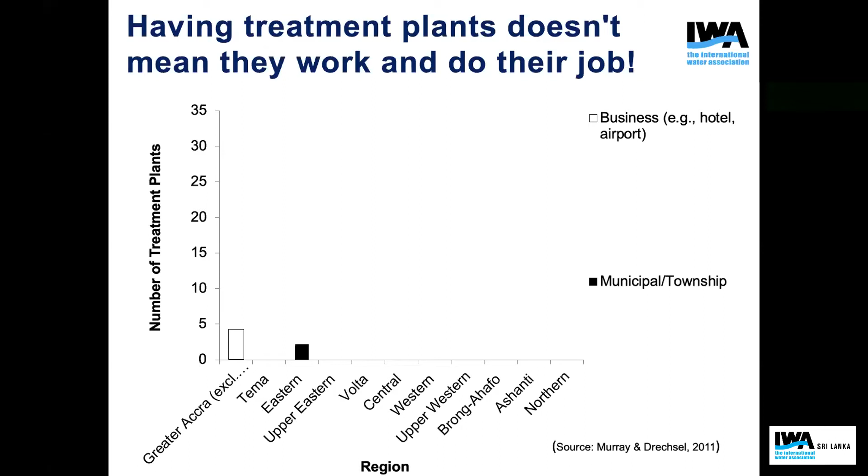When we look at moving forward, I think most people understand that sanitation really needs some sort of disruption. We have to design systems that are simpler and much more sustainable. They have to have small footprints, and much lower CapEx and OpEx costs so that they can be financially sustainable moving forward.

I think there's also a recognition that sewers and wastewater treatment might not always be the best option, particularly in developing countries. These systems tend to be much higher in terms of running costs, with much higher energy and water inputs. When you're in an environment where water and energy may be unreliable, and you have very poor operation and maintenance paradigms, these systems become dysfunctional.

The other problem is that while sewers and wastewater treatment works have been built but not functioned particularly well, the systems we've put in place for on-site sanitation have also not performed particularly well. From a user's perspective, they're very often not preferred solutions because they're smelly, they're not desludged regularly, and so they're not a very attractive option. Now, they may be attractive from a cost and maintenance perspective, but the way we're implementing them now is probably not appropriate. So we have a situation where both the sewers and wastewater treatment solutions aren't particularly great, but also the on-site solutions are also not particularly great.

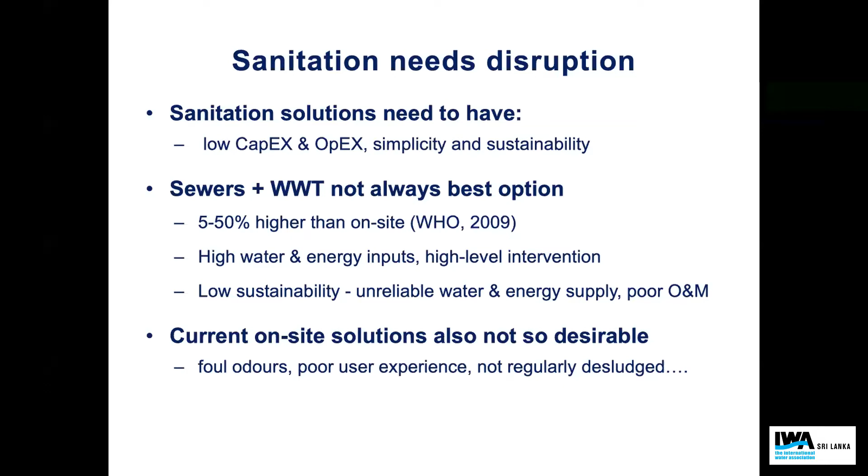So we do need some innovative thinking in this space to come up with solutions that are going to work. One of the interesting opportunities we have is that we can learn quite a lot from the mistakes that the West has made. When I look at wastewater technology development in the West, it's been a very hit and miss type approach.

They started 50 years ago with very clunky systems, very large concrete infrastructure, based primarily on a lot of rules of thumb. You can almost imagine the last 30 to 40 years was like one big pilot study in the West, where they were really trying to understand how wastewater treatment processes work, and trying to optimize them. They've started to develop some innovations, and you can see some of them there at the bottom, things like granular sludge, things like Anammox processes.

These processes have all brought down the size of these systems, and improved the energy efficiency of these systems. Now these innovations have also enabled very good cost recovery, resource recovery and reuse, where you can extract things like nutrients and energy from your waste streams and utilize them effectively. So in the developing world, I think we have this opportunity to learn from that process the West went through, where they had very clunky, quite cumbersome infrastructure, moving to systems now which have much smaller footprints and are much more efficient.

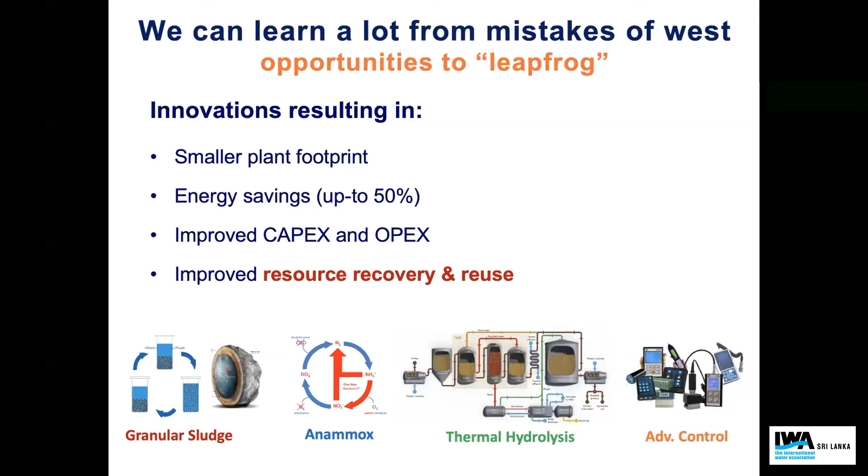When I look at the sort of things that are driving the water sector, I see two things. The first is around the productive use of water. This is where the water sector is moving away from the idea that they want to use drinking water for everything, and are now asking themselves, what is it that I want the water to do for me, and how can I match the quantity and quality of water for that intended use? So they're moving away from one quality for everything, towards mixed quality uses.

This idea of creating different qualities for different intended uses, you see in many places. On your left-hand side, this is the West Basin Initiative in California, in Los Angeles, where they actually produce designer waters, using different plug-and-play technologies to create different grades of water for different uses.

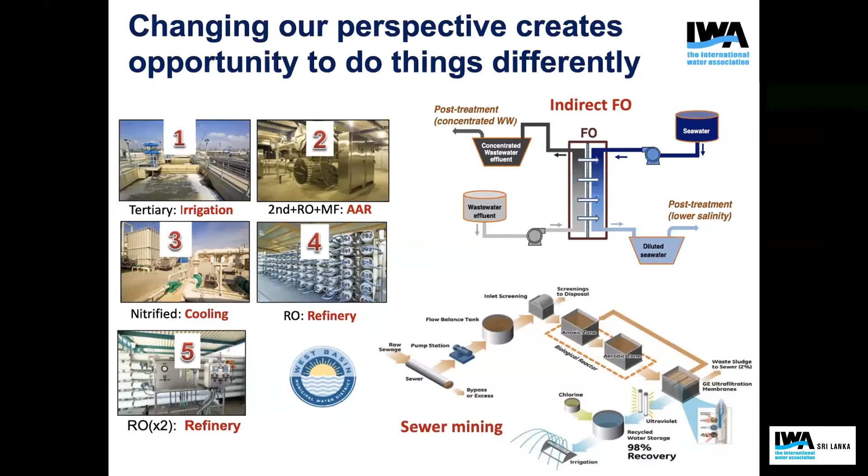In the bottom right-hand corner, you have an example from Australia, where they are viewing the sewer as a water source. They extract the sewage and treat it to supply things like irrigation water. The perspective is that sewerage is a constant supply of water—it's always there because people have to flush their toilets, so there's a fairly constant baseline flow of water.

This is an example from Chennai, where recently we've been doing... someone has their microphone on, so I can hear some background noise. Sorry, can you please mute yourself, because we get some interruptions. Dear ladies and gentlemen, please.

So this is from Chennai. They recently had a very extreme drought and have really started to diversify their water sources, not relying on one source but looking at options. Surface water and groundwater is the usual option, but they've invested a fair amount in desal, large amounts of wastewater reuse particularly for industrial estates, and rainwater harvesting and demand management. Very interestingly, they have quite a lot of mines and quarries on the outskirts of the city that were acting as reservoirs. During the recent drought, they started to extract that water, treat it, and use it for purposes within the city.

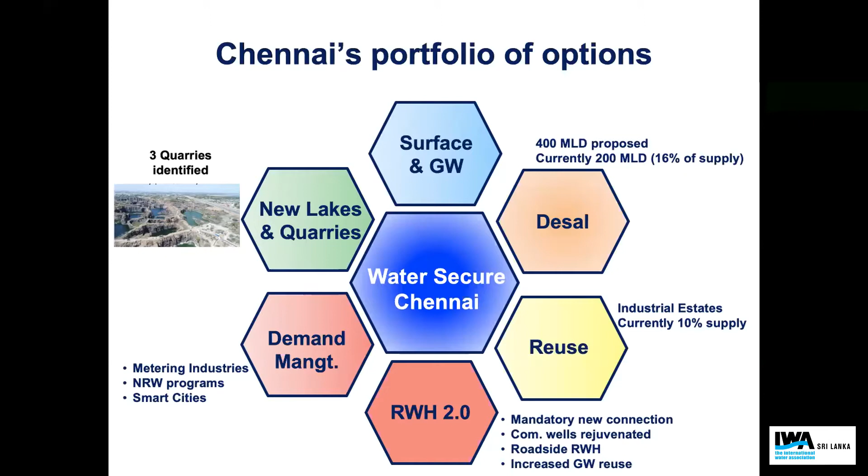This idea of creating a portfolio of solutions to meet growing demand is consistent with the productive use of water. When we think about different grades of water for different uses, we have to view the water cycle as one, and view all water within it as good water, just of different grades. You have traditional sources—surface water, groundwater—treated and fairly high quality. Your leakage and demand management water is also high quality drinking water that can free up a lot of resources. And your gray and black water can be used, with or without treatment, for purposes like irrigation.

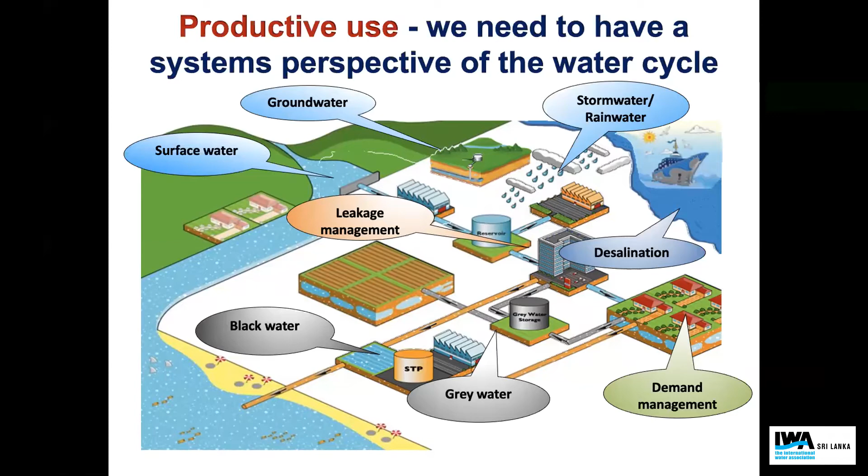For example, if I needed more drinking water for a community, the question would be: do I invest in extracting more surface water and groundwater to meet that growing demand, or do I invest in leakage and demand management, which could free up high quality water for that use? If I needed water for gardening purposes, would I automatically extract more surface water and groundwater, or could I treat my gray or black water and use it for that purpose? By viewing the entire water cycle as one, you can match different needs to the different flows that exist, and minimize your overall water footprint.

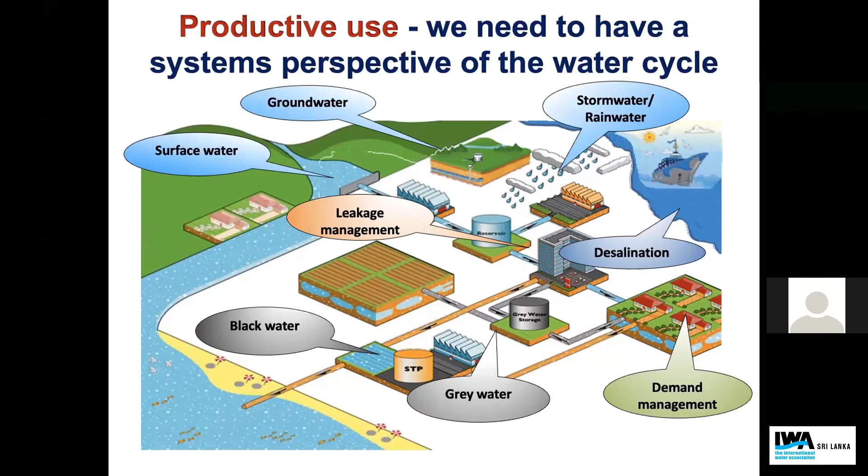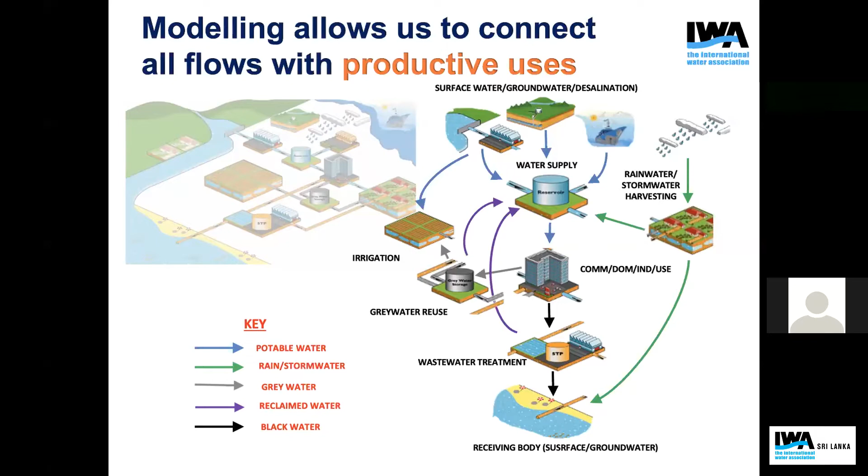Critical to this is really having a systems perspective—this idea of connecting different flows to different types of users and matching different grades to different users. By doing this, you can do water balancing, both in terms of quantity and contaminant fluxes, which allows you to minimize your water footprint. We've done a lot of work in this respect, applied both in India and in many countries in Africa.

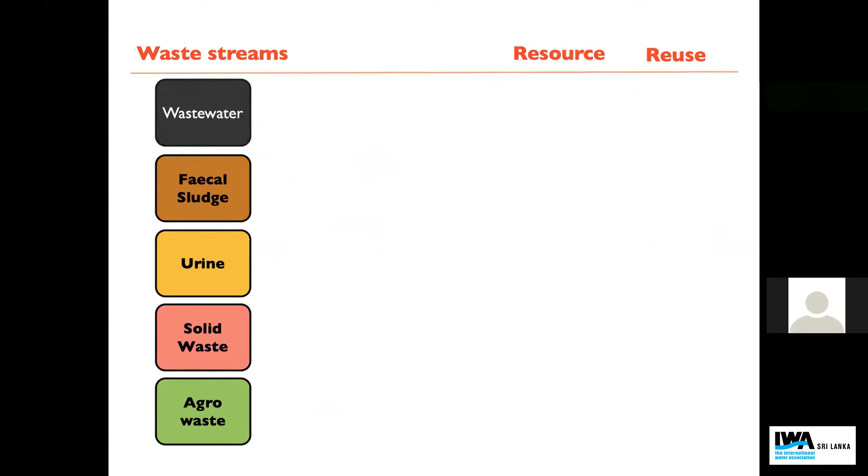The other big change in paradigm is this idea of waste as a resource. There are many waste streams that exist within an urban context, but also within the rural-urban interface, and those waste streams can be used very productively for different uses. It's this combination of different waste streams that is very interesting.

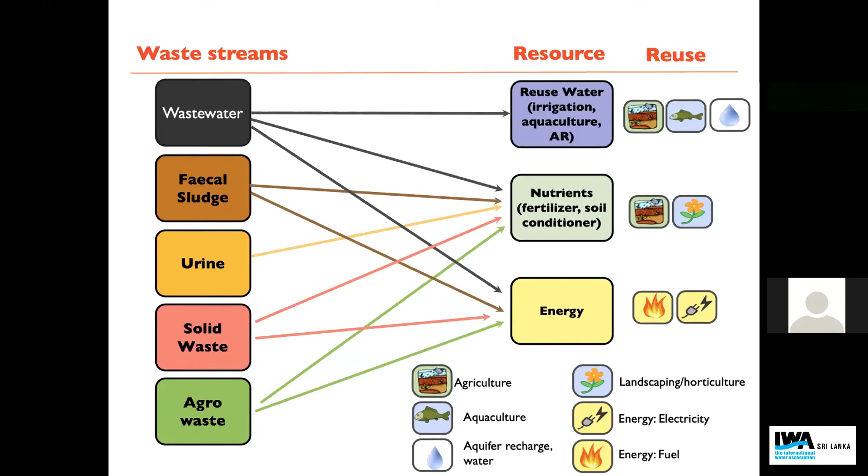For example, if you wanted to produce substantial amounts of energy, it would be worthwhile considering the combination of wastewater combined with agro-industrial waste, which would maximize your energy production potential. Where you locate your energy-producing machine would be very much based on where these different resource streams could be harvested. So it's the combination of these different waste streams that really gives you value.

Not just that, but it's also where within the water cycle that you decide to capture some of this value. If you're looking at energy, there's been a lot of research where people have tried to look at how they might capture energy through microturbines, both in drinking water networks, but also in the sewer networks.

Heat recovery is very common in sewer networks. People are able to use heat capturing devices. And then, of course, at the centralized treatment works where you can get biogas production through anaerobic digestion, or now innovations in things like microbial fuel cells.

In terms of nutrient recovery, again, you can capture that in different places. You can do it on site. Fecal sludge management allows you to generate nutrients, sort of with on-site sanitation systems, but you can also do it in a centralized sort of treatment works as well. So where you place your recovery options is also very, very important.

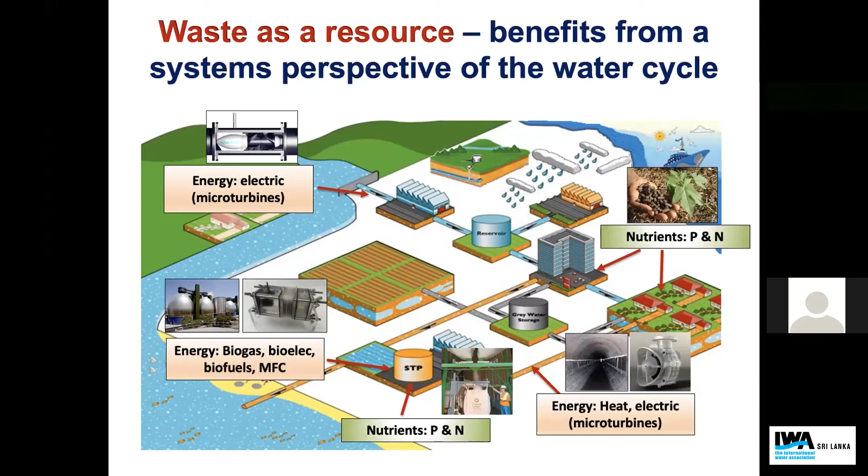But there are challenges, right, when you start to do things like resource recovery and reuse. And it's really the context in which you're working your systems.

If you take energy, for example, there are many barriers. There are market risks associated, for example, with competition from other fuel providers. If you are competing with other fuel providers who are being subsidized, then it's very difficult for you to make a business case. If you do decide to co-digest with, say, municipal solid waste, then you have challenges with the non-segregation of waste, the low tipping fees for waste collection, and then things like non-compliance with regulations.

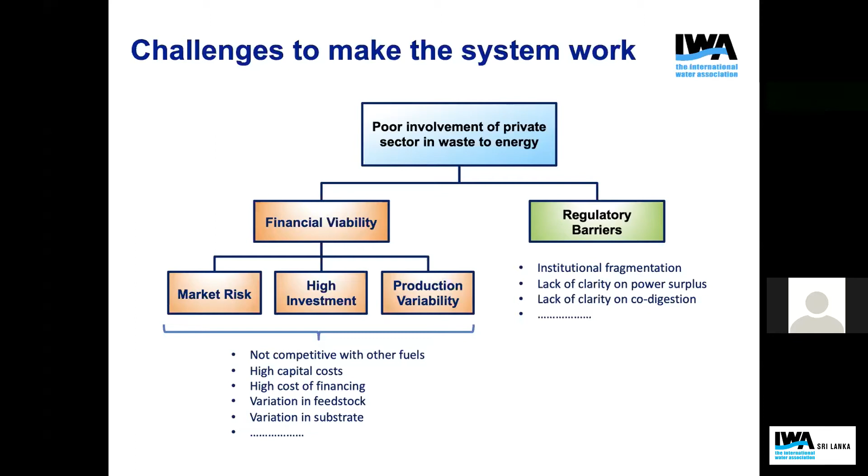Now, all of these issues might result in inferior quality substrates that affect the productivity of your plant and ultimately affect the amount of energy that you can generate. And so you have to understand the context in which you're operating and the landscape so that you can see if actually there is a business to be done here. Is it really worth your while to try and capture and generate value from your waste streams?

And for this, understanding of the business models is key. And again, when I was at IWMI, we did a lot of work around these business models. And what we found was that many of these resource recovery reuse systems didn't work because people didn't really understand who the customers were for the products that they were generating. They didn't understand what their value proposition was. They didn't understand why a customer would choose to buy fertilizers from them rather than buying it from somebody else.

Was it because their fertilizer was cheaper? Was it because their fertilizer was more effective? Was it because their fertilizer was green? And they didn't really understand the effort it required for them to take that value proposition to the customer. So how much infrastructure would have to be created, and what would be the cost of that infrastructure for them to actually take their product to the customer and sell it effectively?

And so many of these resource recovery systems work initially because someone is funding it. So there is risk capital. But when these systems are left to their own devices and they have to make money by themselves, they become very problematic. So I think it's very important to recognize some of these issues.

Particularly as we move forward in WASH, where we're trying to use resource recovery and reuse as a way to finance the operating maintenance cost of our infrastructure. So in the next 20 years, I do think that it's going to be a golden age for WASH. I think a lot is happening, huge amounts of investment, both in wastewater and in non-sewered sanitation. But I think we need to think about how we do things better.

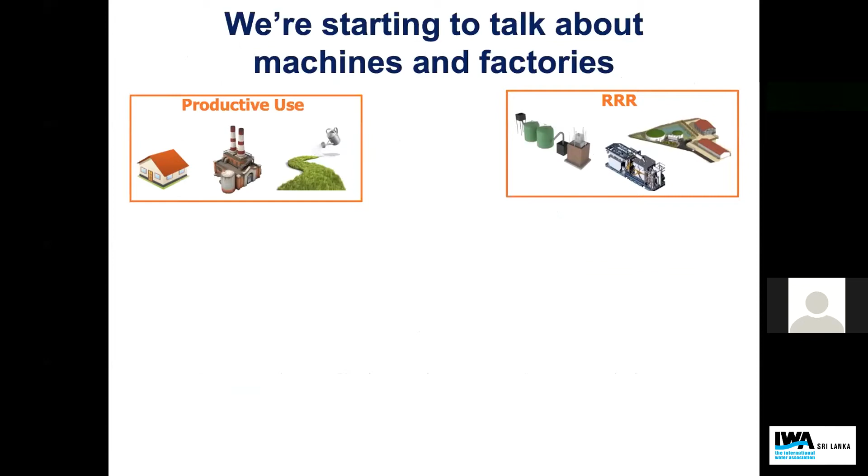Finally, these two concepts of productive use and resource recovery and reuse are shifting thinking within the water sector away from the idea of water treatment systems and wastewater treatment systems, toward this idea of a water machine or water factory, where the machine can take waters of different grades and you turn the handle, and it produces waters of different grades for different users—a bit like the designer waters I was talking about.

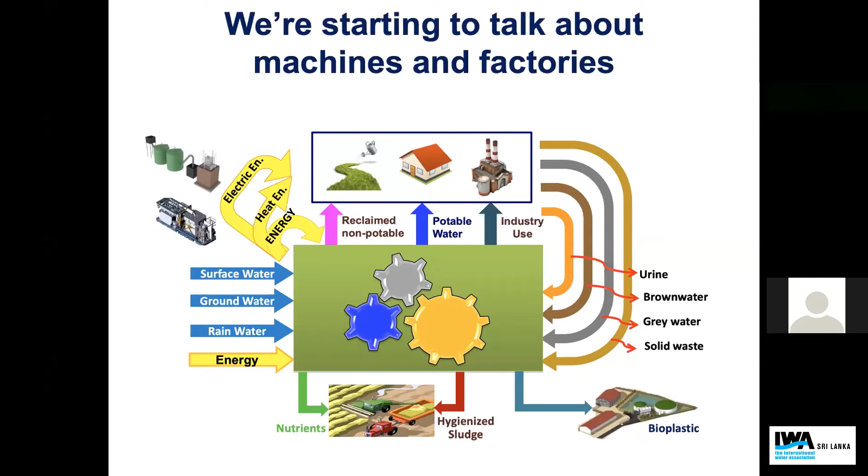You can turn this handle and the machine can produce energy in the form of heat or electricity, and you can turn the handle and it can produce other byproducts like nutrients and bioplastics, etc. So people from outside the water sector are starting to develop these types of systems. Where they locate them and how they design them may not be primarily driven by thinking around water—they might actually want an energy machine, and see water and its products as feedstock. So the whole system is designed around another objective, and water is seen as a byproduct.

As I said, scale starts to become very important, and as you start doing these clever things, you want to maintain a relatively small scale. The work we've done has shown that populations of around 30 to 50,000 inhabitants is a good scale to do some of these clever resource recovery and reuse type options.

The other benefit of these decentralized or distributed systems is that in growing urban areas, as they grow over time, you can incrementally add modules. You're not building centralized infrastructure—a backbone that serves a large city from the outset—but instead adding these decentralized units. Your system grows with the city, allowing you to follow that growth trajectory accurately, instead of anticipating growth and ending up with unused capacity. And even in areas where you already have centralized infrastructure—

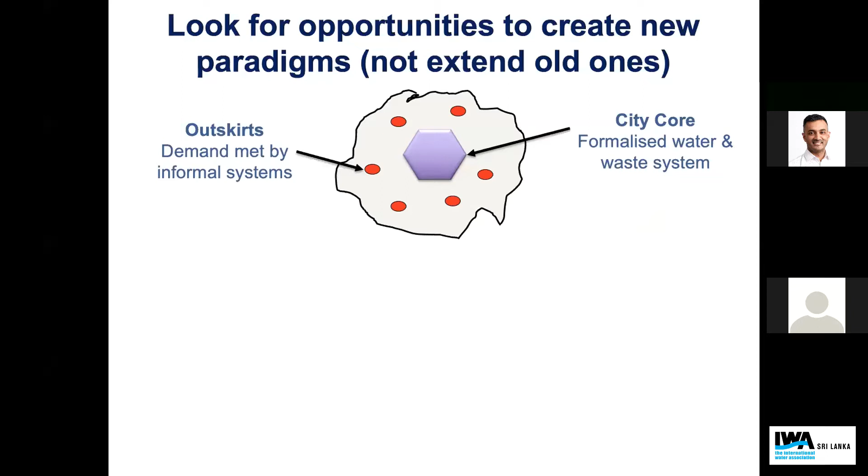if you look at this pinkish-purplish hexagon in the middle as your centralized sewer network, and on the outskirts people have been using on-site sanitation, shown as red dots—the traditional model, particularly in colonial countries where the central infrastructure might have been built by the colonialists, is that as we've grown, we've just extended that centralized infrastructure outward from the center. So we end up with very large spaghetti-type systems.

That's certainly the case for our water networks. With sewer networks we find large areas not covered, but we keep trying to extend that centralized core. The new paradigm is to say: forget the centralized core, ring-fence it, and treat it as one unit of operation. Then on the outskirts, try to create decentralized units—so you end up with a hybrid model.

You can have a part of the city that has centralized systems, but another part of the city where you have decentralized units, which give you a lot more flexibility to do some of these clever things.

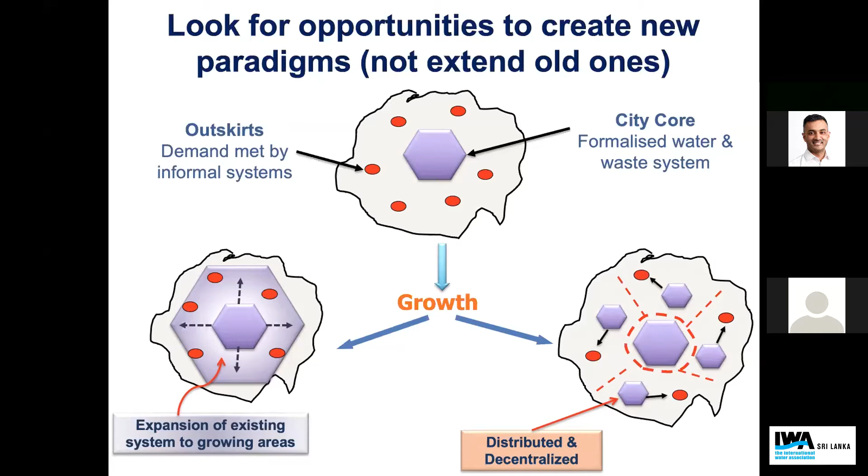I always finish with this slide. As a sector, and I think this is also true for Sri Lanka, we have various options available to us. We can stay in the business-as-usual lane, but that's not really an option because with global change pressures taking place, particularly climate change, but also urbanization and population growth, there is going to be a supply-demand deficit in terms of water. So we can't keep building the same systems we've been building, which are really based around 19th century ideas.

What we are currently doing is we're in the middle lane. We're trying to optimize these bad systems that we've built. We're trying to get as much as we can out of them, trying to improve them. But the scope they have is very limited, and the margins are not very large.

I think for developing countries, there is an opportunity, particularly in wastewater and sanitation, where there isn't much infrastructure currently in place, for us to do something very different. We can start from the outset looking at what we want the water to do for us. Can we have different grades of water for different uses? How can we design the system so we can combine municipal solid waste with wastewater and agro-industrial waste to produce energy? How can we ensure treated wastewater and nutrient-rich products can be used at the rural-urban interface to support agricultural production?

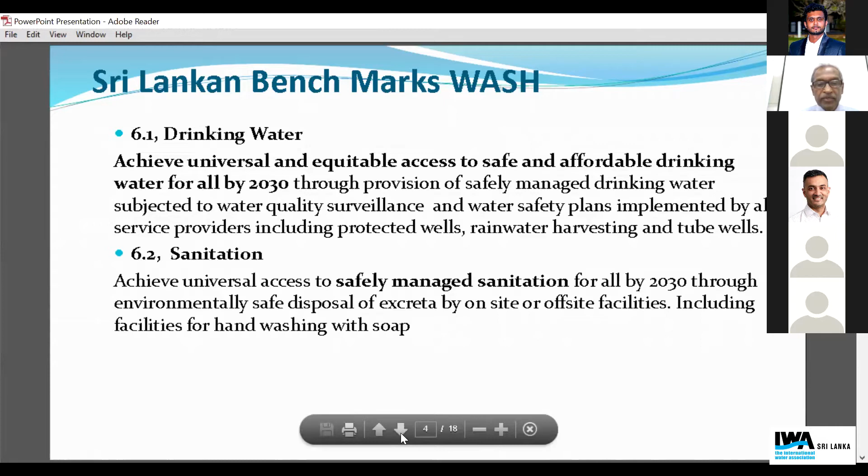Sanitation: achieve universal access to safely managed sanitation for all by 2030 through environmentally safe disposal of excreta by on-site or off-site facilities, including facilities for hand washing with soap. In fact, I fully agree with Professor Kala that we haven't found a sustainable solution for sanitation. So our slogan is 3S, a challenge to practitioners to find a sustainable sanitation solution.

So this is how we reported to MDG. I don't need to go through each and every one, but we have achieved water accessibility of drinking water, we have achieved MDG targets. Now this is the big picture of the current situation, it is in fact the baseline.

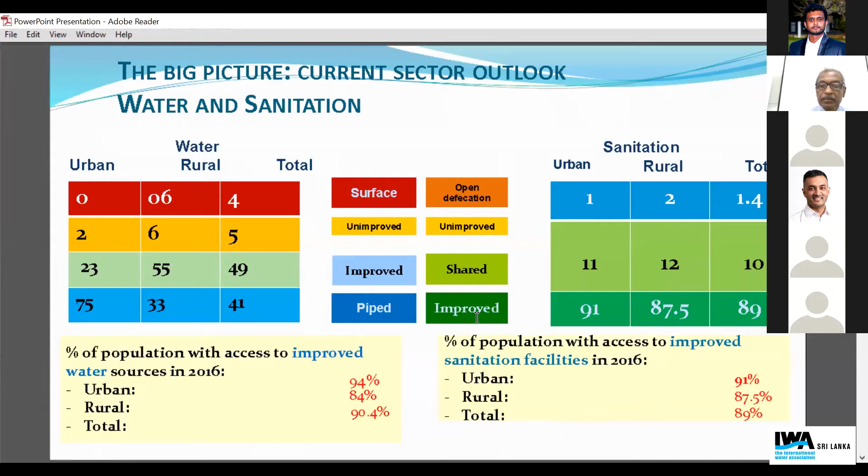This is how our realization of improved systems looks, from surface water to pipe water, and in sanitation, from open defecation to improved sanitation. I think we have reduced open defecation to almost less than 1.5%, it stands at 1.4.

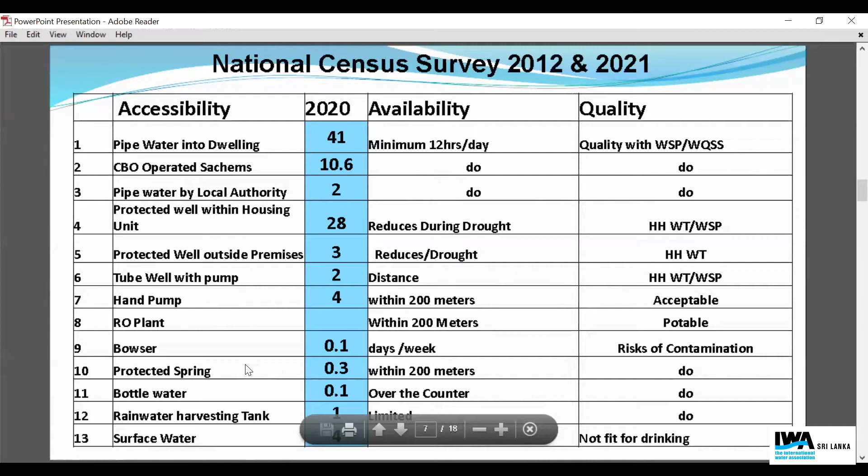So the indicators that we use to monitor drinking water service levels, we have 13 sets of proxy indicators. From this population coverage we derive the Sustainable Development Goal targets, so this is how it goes from 1 to 13, and now we have introduced the indicators for safely managed water in the next census.

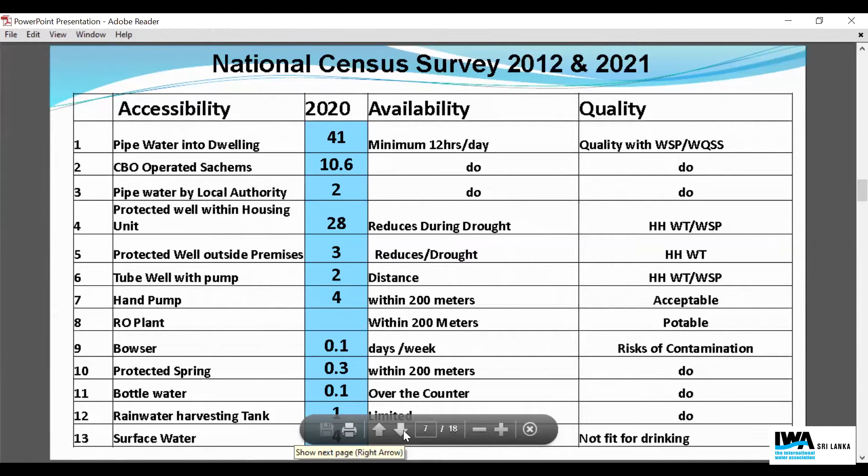I don't need to go through all of it, but I will share all this information so everyone will find it interesting. So this is how the National Water Supply and Drainage Board is progressing towards coverage of pipe water, and how they have increased water connections annually. Annually they have an average of 120,000 households connected to new water supplies.

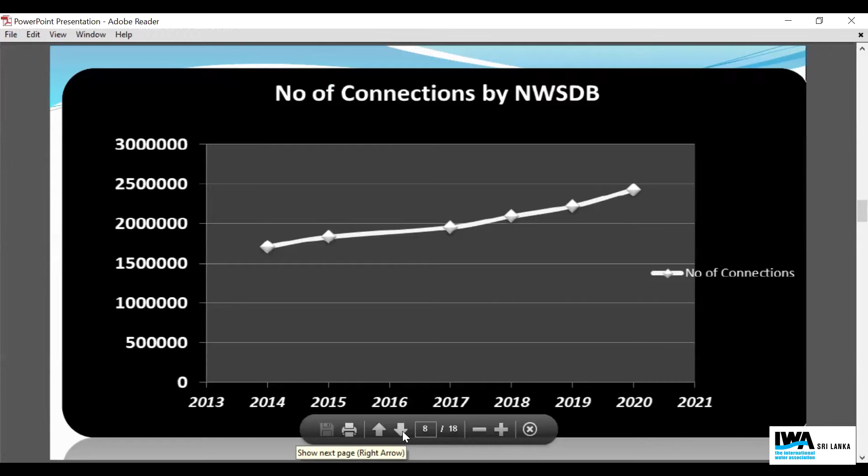So key facts on pipe water supply: 90% of the new connections are household. Up to date there are about 2.2 million household connections maintained by NWSDB. Altogether there are 2.4 million, including commercial and institutional. NWSDB operates 340 water supply schemes, and had about 120,000 new water connections per year. 70% of NWSDB's revenue is from domestic consumption, serving about 8.1 million people.

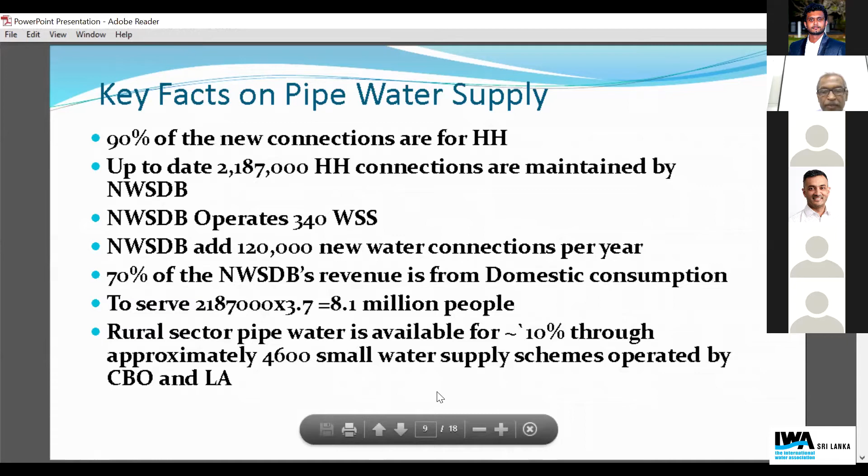Rural sector pipe water is available for approximately 10% through approximately 4,600 small water supply schemes operated by community-based organizations and local authorities. So these are issues affecting sustainability of various water service categories.

Now the pipe water main challenge is to find water resources, because in the wake of climate change water resources are depleting. Depletion of water resources, competing uses of water, seasonal variation in river flows, salinity intrusion, and cost of restoration and rehabilitation. There are a lot of issues for various categories, but I don't need to go through each and every one given the limited time.

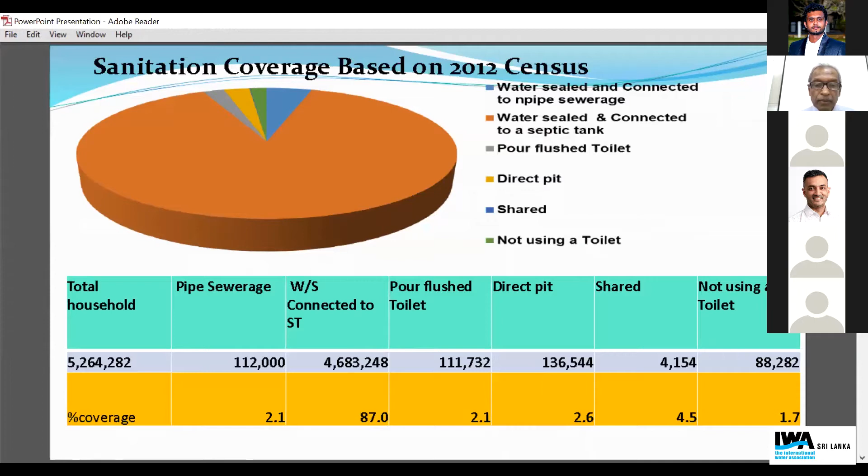So now when we introduce SDGs, we assign various targets to the sector partners. Sanitation is everybody's business, but there are multiple partners, and the means of reporting is percentage of population with access to safely managed sanitation. In wastewater, that is target 6.3, there are a number of agencies, and means of reporting is percentage of treated water, restored water discharged to the environment, and restored water bodies. Drinking water is percentage of population served with safely managed water.

Hygiene, in fact, we are very much in line with hand washing facilities, because after COVID all the institutions have installed foot-operated hand washing systems. We haven't actually done a national survey so far, but in the next census it will be reported.

WASH financing is by the Ministry of Water Supply - the national budget is channeled through the Ministry of Water Supply. Likewise, we have school sanitation. Drinking water regulator is the Ministry of Health, which has already established what is called the surveillance system, risk assessment, and advised the service providers.

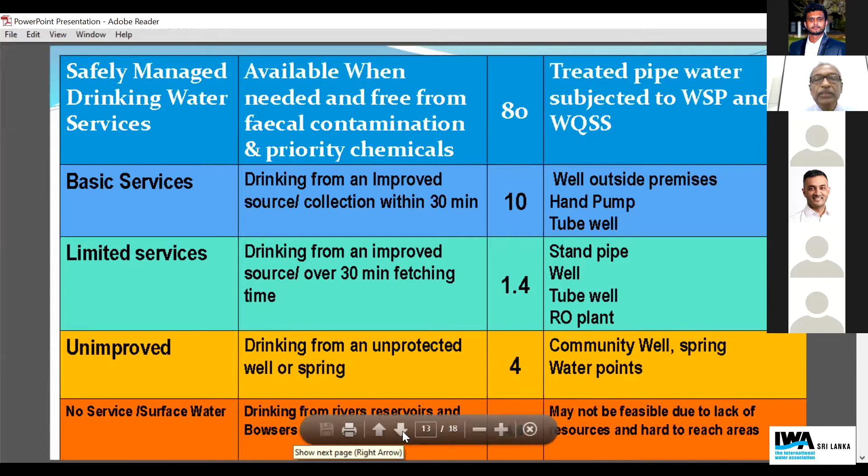In the sanitation sector, safely managed sanitation is defined as use of an improved sanitation facility which is not shared with others, and excreta safely disposed on-site or transported and treated off-site. So we just use this figure from the MDG era that represents 87% of the population connected to sewers, connected to septic tanks, treated in septage treatment plants. This figure will be revised after the national census.

So basic sanitation is flush toilet with soakage pits. Limited is shared toilets, and unimproved is pit latrines, bucket latrines - I think we have eradicated bucket latrines in the 80s. So open defecation, still we have to deal with about 1.7%.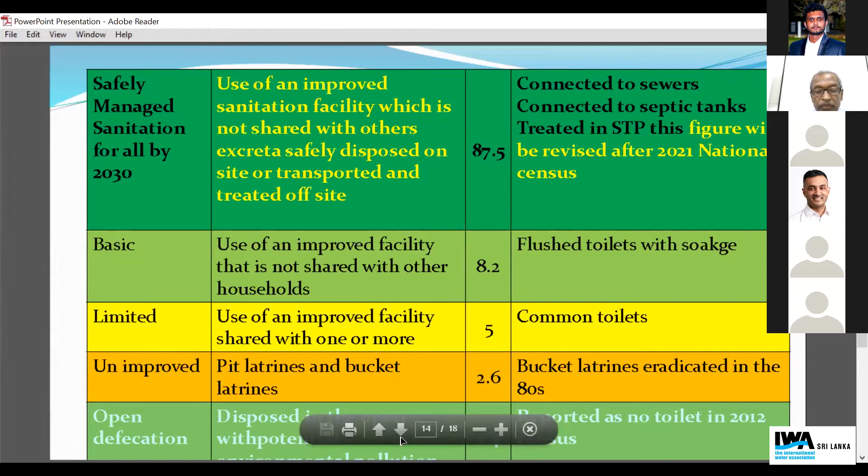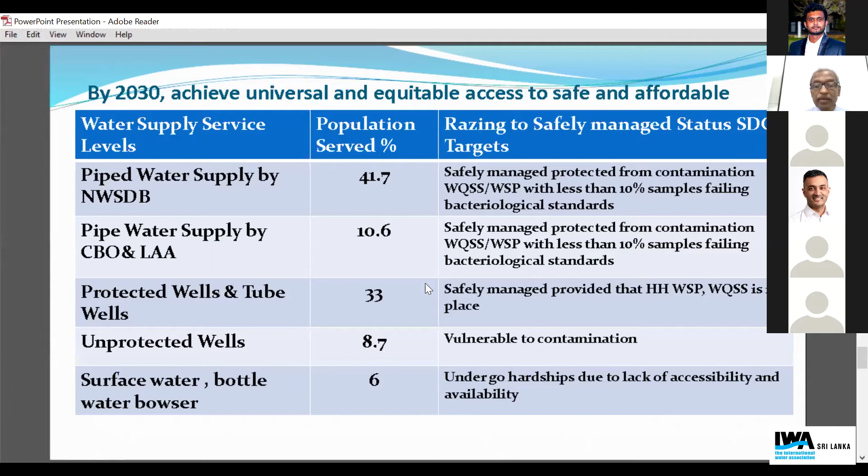So by 2030, achieve universal and equitable access to safe and affordable drinking water. I think now the government has a more ambitious target to achieve universal access to water in 2025.

Now this is the big picture. We are dealing with 2 Qs and 2 Ss: quality, quantity, and safety and security. This is the challenge that we are facing - challenges in achieving goals and targets. Water is a diminishing resource, a limited resource. Value of water is reducing, cost of water is rising.

Now this statement is very complex. I think we need a very elaborate discussion on this - value of water is reducing, cost of water is rising. Water is the first casualty of climate change. Is 24/7 water supply a reality or a fantasy? That is a big question. I don't think in time to come you can achieve 24/7 water supply.

Then accessibility, availability, and quality we need to achieve. Charging real cost of water and full cost recovery is one of the biggest challenges. Then there's the political economy of water - how do we convince the politicians of the kind of political economy that we need to progress? Water, financial resources, and time are the 3 main aspects of progress to achieve national and global goals.

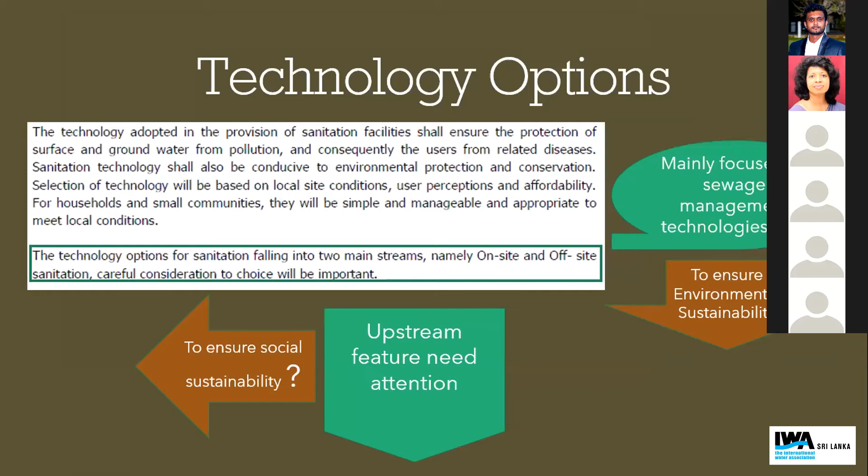And under the legal framework, however, it covers the provision of standards and guidelines in a broader sense. Also, the sector partners have been identified adequately to ensure financial viability as well as implementation effectiveness.

And most importantly, although the national policies are sound, Sri Lanka has encountered challenges in bringing its overall policy environment to a level that is generally accepted. It has paid attention to research and development, especially focusing on overcoming the main constraints in achieving the national sector goals.

Let's see where we stand. Do we have gaps? According to the World Health Organization and UNICEF, while sanitation coverage in Sri Lanka is one of the best in South Asia, it needs to improve rural school sanitation, facilities for the disabled, and the problem of groundwater contamination resulting from on-site sanitation in congested townships.

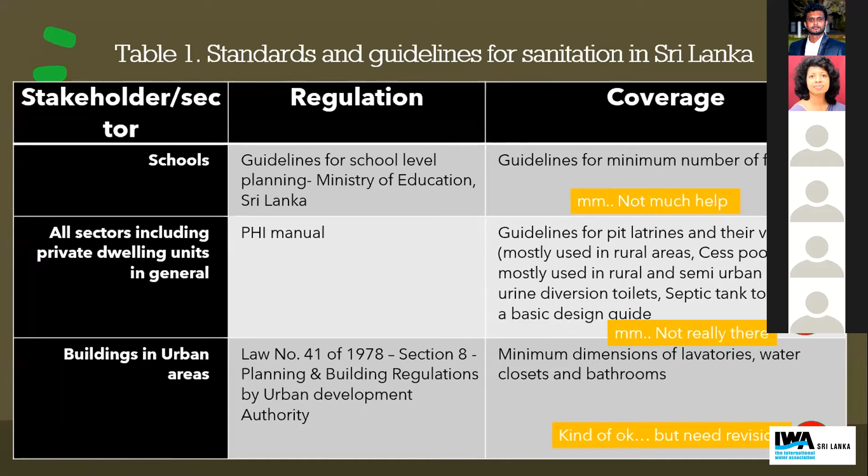Now we have specific regulations covering schools and private dwelling units, buildings in urban areas. When it comes to coverage, most of them are not much help, and maybe not really there at the level we need.

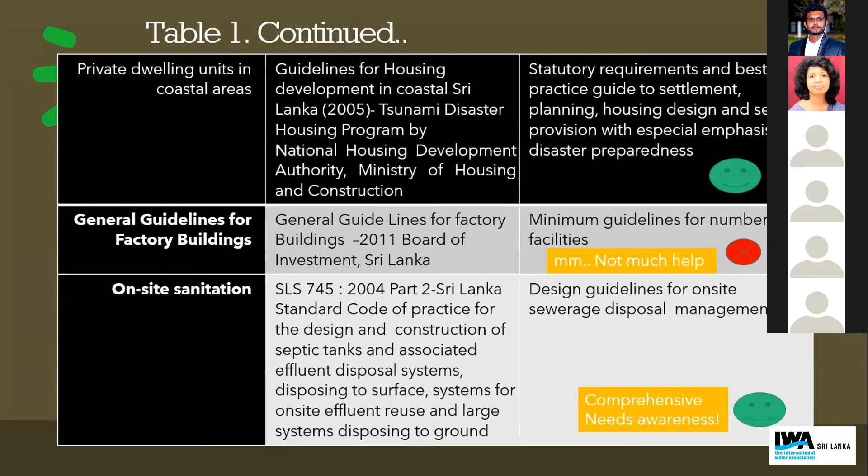But there are really good standards and guidelines, such as even the coastal areas where private dwelling units are addressed during the tsunami, and also the on-site sanitation SLS standard covers really good coverage. But again, we can have more awareness and capacity building in these areas as well.

Now, if you look at the Act 28 of 1996, which covers disabled people in all public areas, buildings, places, and so on, it's really a comprehensive document, but this could also be supported with more awareness as well as capacity building.

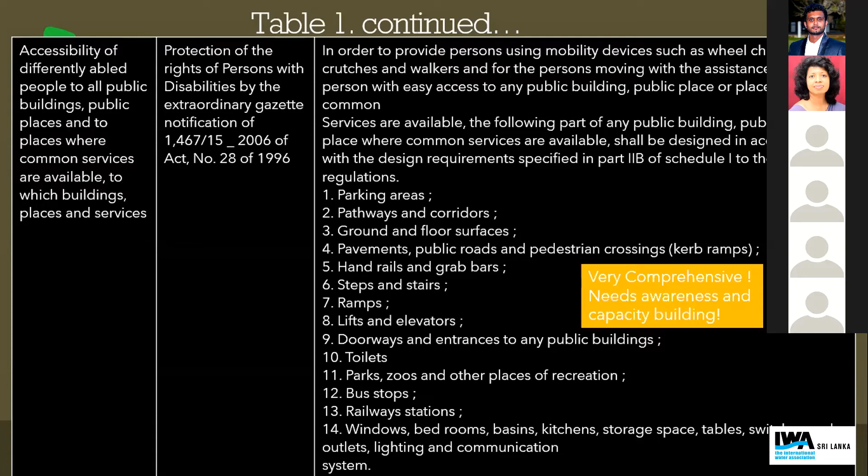Let's see the challenges faced by communities in different social, cultural, and geographical setups, which can be identified in the following manner in 5 sectors: domestic sanitation in urban areas, domestic sanitation in rural areas, sanitation in schools, sanitation in workplaces, and sanitation in public areas.

But can we be happy? At this rate, if you take only 20 to 25% of a class around, having 50 students will be able to use a toilet. So I leave it up to you to rethink.

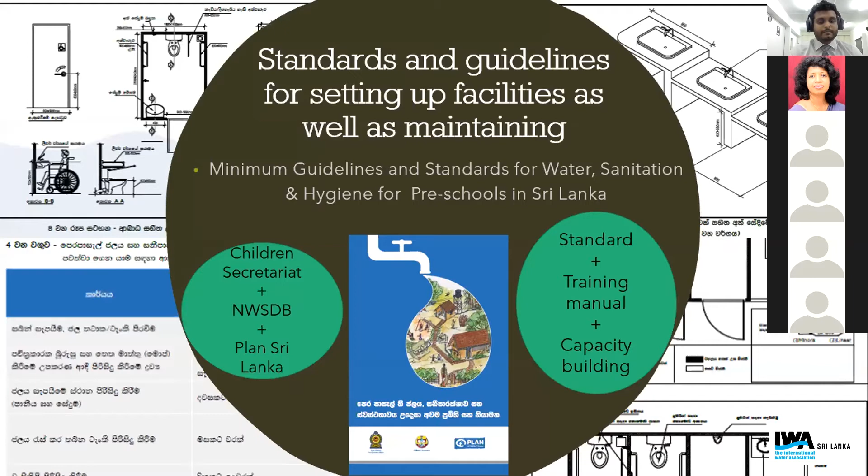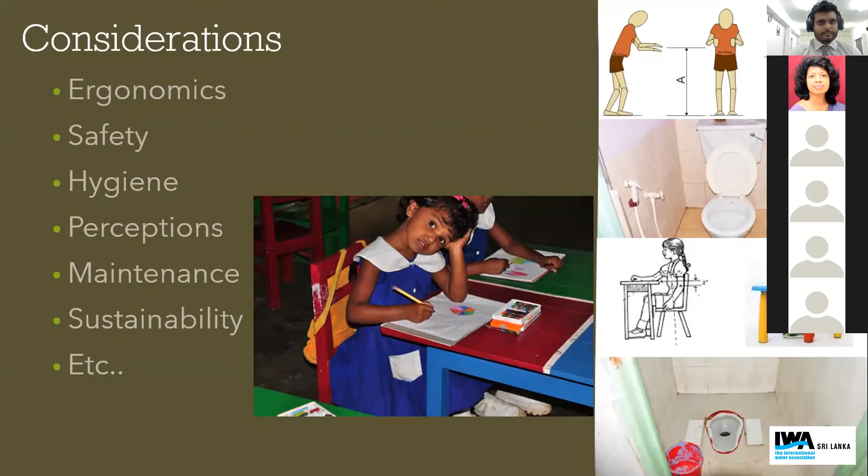We were able to develop detailed plans and guidelines for developing as well as maintaining these facilities, and these are the considerations we were able to incorporate. Especially, we found that the ergonomics in Sri Lankan children are a bit different to that of other countries, and therefore it should be taken into consideration. Other factors such as safety, hygiene, perceptions, maintenance, and overall sustainability were also included.

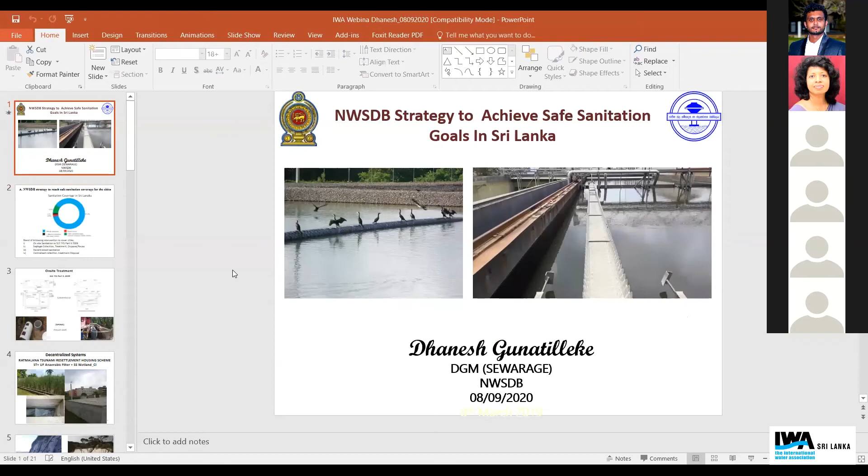I'm going to present basically three areas in my presentation. Some of the strategies that we have adopted in the National Water Supply and Drainage Board. The first one will be the NWSDB strategy to reach safe sanitation coverage for the cities.

In Sri Lanka, as at 2019, safe sanitation coverage from on-site sanitation is around 87.4%, compared to the public sewer system, which is a mere 2.1%. So now Sri Lanka is moving from a low income country to a medium income country.

So therefore, to meet the safe sanitation coverage, what we think is we should proceed with four areas. The first one is on-site sanitation systems, which should comply with the Sri Lanka Code of Practice, SLS 745 Part 2, 2009, where we can design and construct septic tanks and associated effluent disposal systems, and further treatment options like upflow anaerobic filters.

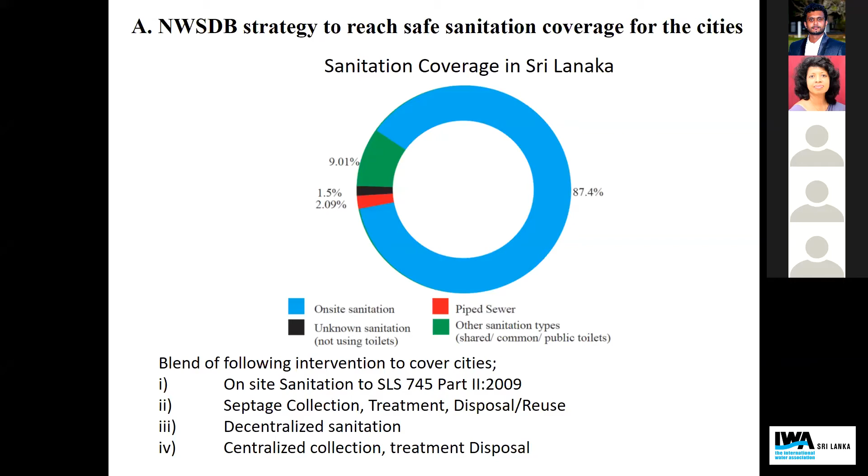So that is what we are right now doing, and the donors, especially the World Bank, are also of that view, because the World Bank is considering city inclusive sanitation. So it's more or less similar to this approach.

Then, on-site sanitation systems, basically septic tanks and further treatment options like anaerobic filters, are available in SLS 745, and further treatment options are there. Under the Global Partnership on Output-Based Aid Project implemented with World Bank assistance, we developed for low-income areas a precast unit having a septic tank and an upflow anaerobic filter.

In the lower pictures you will see soakage pits using precast units. These units can even serve high water table areas, because organic removal is taking place within the septic tank and the upflow anaerobic filter. Therefore, that will create minimum impact on the environment.

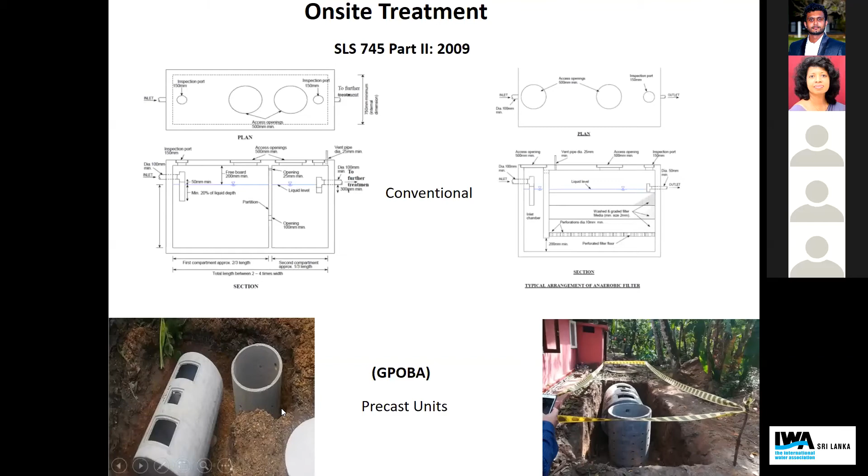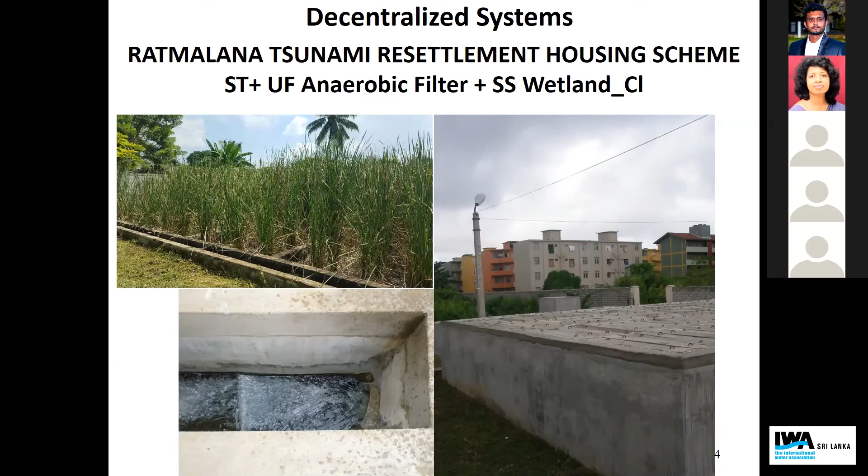In case of decentralized systems, one example is the Ratmalana Tsunami Housing Scheme, where 324 housing units have been constructed. The investor for the housing included septic tanks for two of the 4-storied buildings, and NWSDB constructed the sewer network and lifting station, a pumping station, upflow anaerobic filter, and subsurface constructed wetland. The treated effluent will be chlorinated before discharging to the canal leading to Lunawa Lagoon. This is one of the decentralized options we have constructed and that is operated and maintained by the water board.

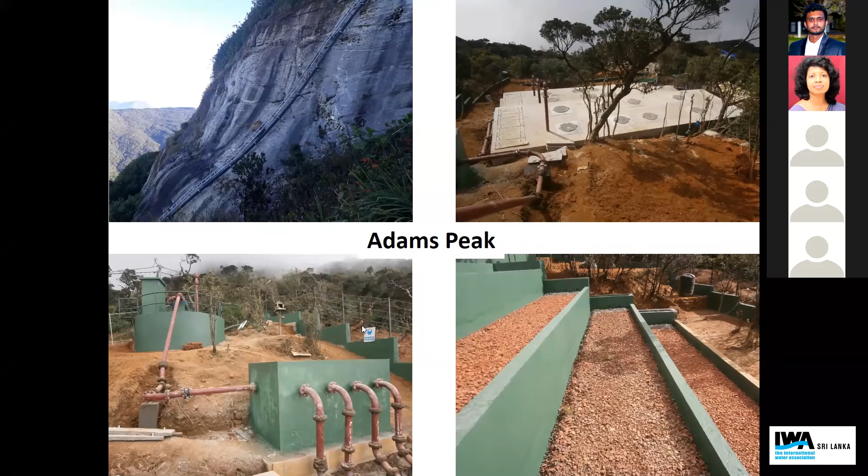The next example is Adams Peak, where there are toilet blocks in the upper area. We constructed a sewer network there—probably the first of its kind, because it doesn't have a conventional sewer network due to the profile of the area. Finally, at the lower location, we have a septic tank combined with an anaerobic filter, polished with a subsurface constructed wetland. So that is two models that we have developed for decentralized options.

Soon after the tsunami outbreak in December 2004, we had an opportunity to design a septage management system for the camps, and later emergency sanitation for internally displaced persons. We constructed pond systems comprising an anaerobic pond, facultative pond, and maturation pond. This actually paved the way for septage management in Sri Lanka.

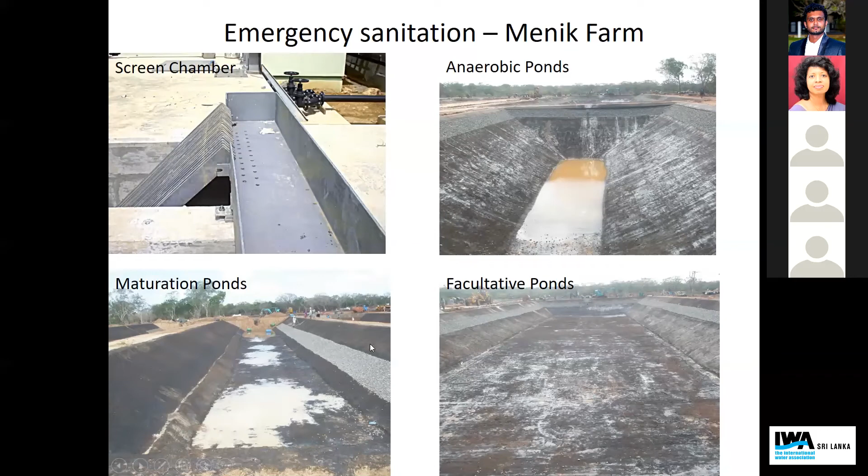Right now we have constructed and started operation of 2 septage plants under the World Bank assisted WASIP project in Mullaitivu and Kilinochchi. Here you can see some pictures of the 2 septage treatment plants that have started operation, and we are building 5 more under the WASIP project. This is really necessary for each district in order to address the on-site sanitation issues of the country.

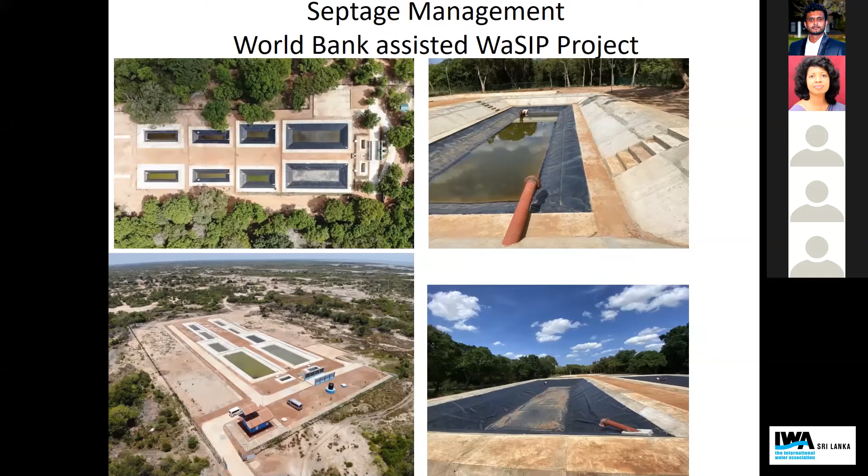Under the WASIP project, we had another challenge, because conventional pond systems require a large extent of land, and we can't have this much land everywhere. So we had to develop a strategy to manage septage in a small area. We built a model considering only the anaerobic pond as the initial treatment, especially since septage contains a lot of sand and other inert material.

So to separate them, the treated supernatant of the anaerobic pond undergoes activated sludge extended aeration treatment, and we are building sludge drying beds to remove the accumulated inert material in the anaerobic pond as well as excess activated sludge. Then this water, after clarification, will undergo chlorination and be pumped for reuse, because these plants are almost close to composting yards, so they need the water. The first of this model will be under construction in Thalawakale.

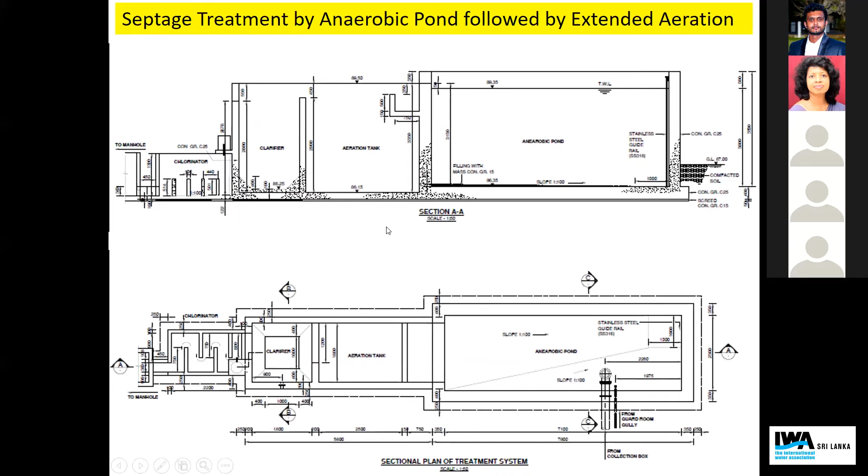So that is about how we manage the city sewerage system, how to manage the city with the 4 options. The second point I'm going to discuss is the NWSDB strategy for wastewater treatment. Under option 1, you can see the pond systems. First, we consider the preference of pond systems because the operation cost is lowest, and the operation is entirely natural.

The second option, when we have moderate land availability, is flow-through aerated lagoons with maturation ponds. The third option, when we don't have adequate land, is activated sludge extended aeration. And if the discharge location is sensitive, we go for nutrient removal. So those are the 3 treatment options we are considering.

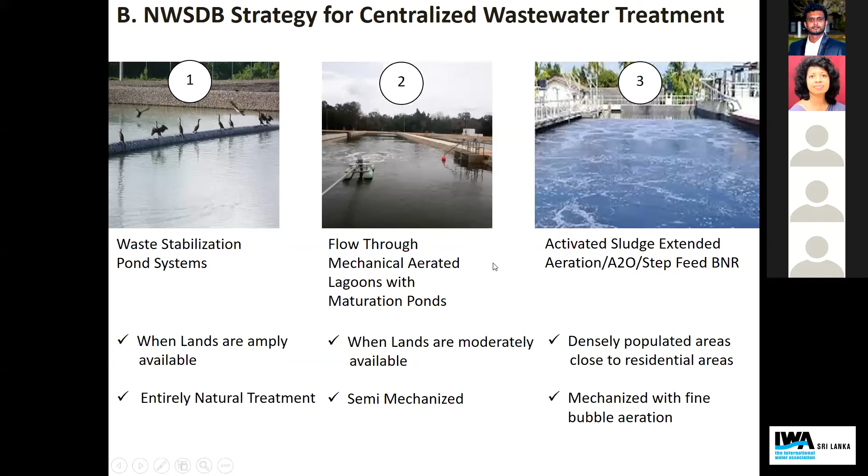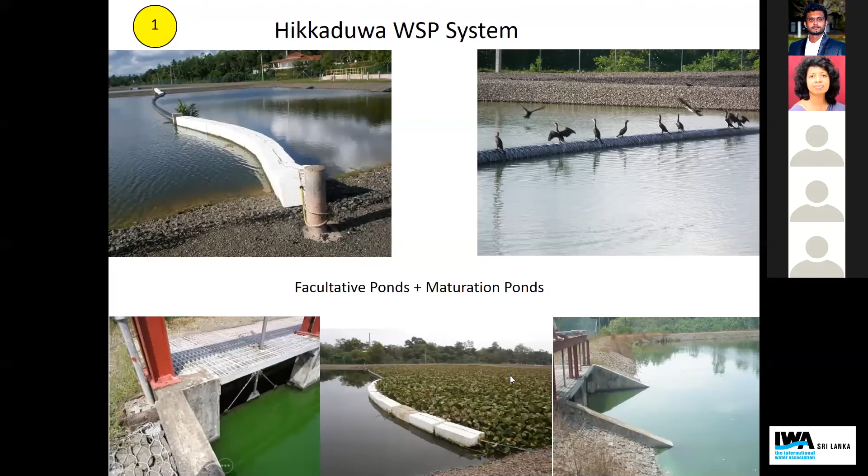The second option is aerated lagoons. We have constructed one in Kataragama Sacred City. Here you can see the aerated lagoons and finally the maturation ponds with the floating wetland. What NWSDB has done for the maturation pond, in order to separate the bacteria flocks from the aerated lagoon, is deepen an area in the maturation pond, creating 3 sludge pockets and also a downflow baffle there. You can see the downflow baffles, and individually these sludge pockets can have sludge removed through progressive cavity pumps to sludge drying beds.

This is very much similar to the technology that we adopt in water treatment plants, having plate settler clarifiers. The sludge pockets are there. You can see in this picture, we can check the sludge level from the sludge judge, and you can see highly clarified water that is being discharged to the Manik River.

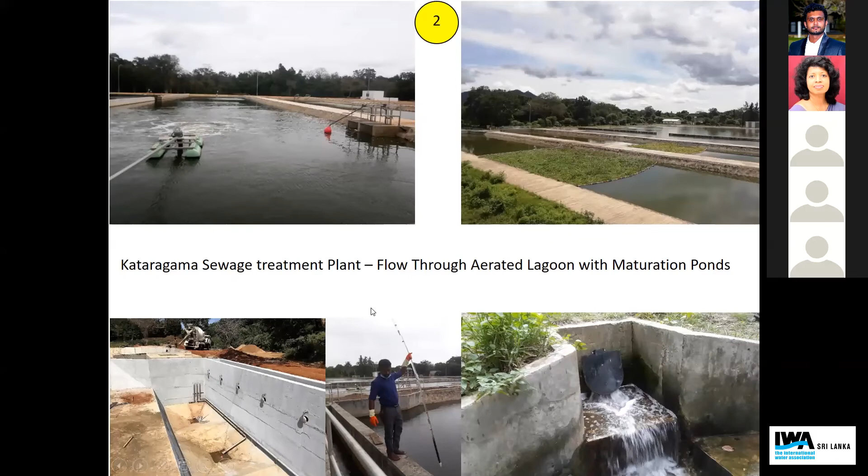So that is our second type of treatment strategy for lands available, moderate land availability. And in case where we don't have a lot of land, as the treatment plants built close to the residential areas, we go for activated sludge extended aeration with fine bubble aeration.

You can see the newly commissioned treatment plant in the picture in Kandy City in Gatambe area, and the treated effluent is just discharged to the Mahaweli River. What we adopt there is submerged propeller with fine bubble aeration, so that will not produce any aerosols, and also with the submerged propeller we can control the oxygen to create anoxic conditions to improve the denitrification. This is being discharged, and 3 kilometers downstream, we have the major water intakes downstream as well.

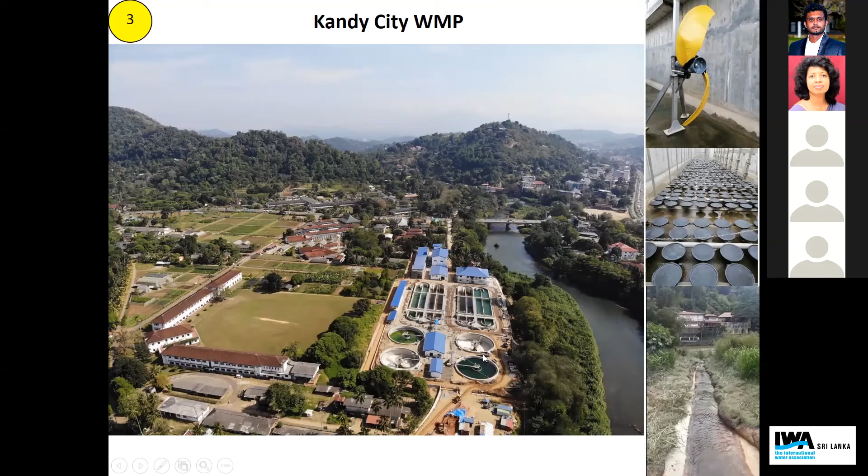So then the sludge treatment strategy that we are adopting in the water board is, if there is low precipitation, dry zone areas, we go for conventional sludge drying beds. And in some cases, we go with polycarbonate roof to prevent the sludge being swelled due to rainwater interference.

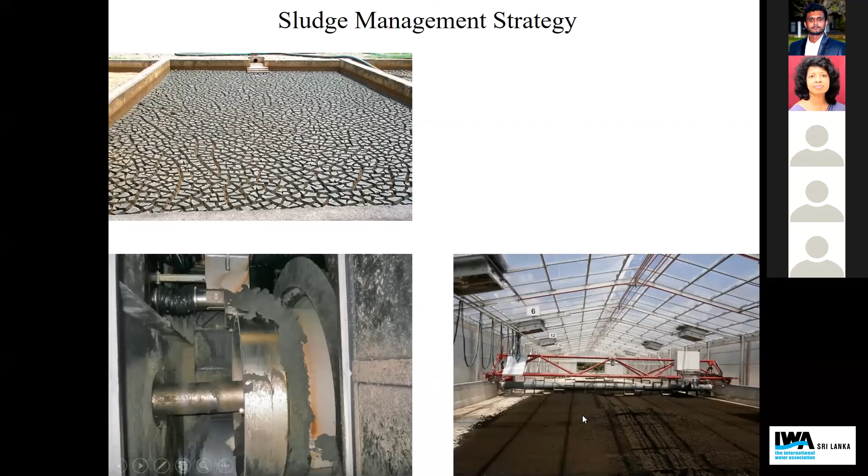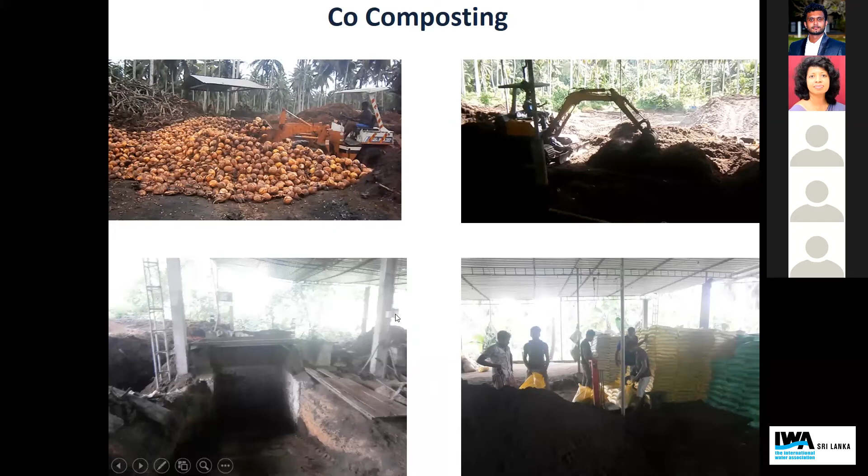And in densely populated areas, we go for belt filter press or screw press dehydrators, followed by solar dry beds where the pathogens are deactivated and the dry solid content after mechanical dewatering is around 20%, and it can be increased to 40% to 70-80% depending on the input in the solar dryer, and then the dry pellets are more or less sent to co-composting purpose. So that is our strategy for the sludge.

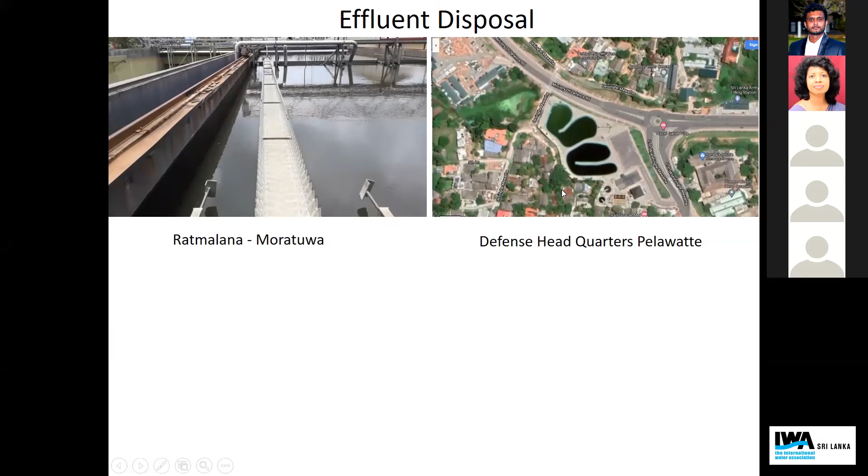And also for the strategy for the effluent disposal, we have EIA approved for the Jaffna City sewerage project. Rather, the treatment plant is close to the sea, but we will be pumping 4.5 kilometers upstream to the agricultural land, especially for paddy cultivation and for agricultural use. So for this one, the EIA is approved.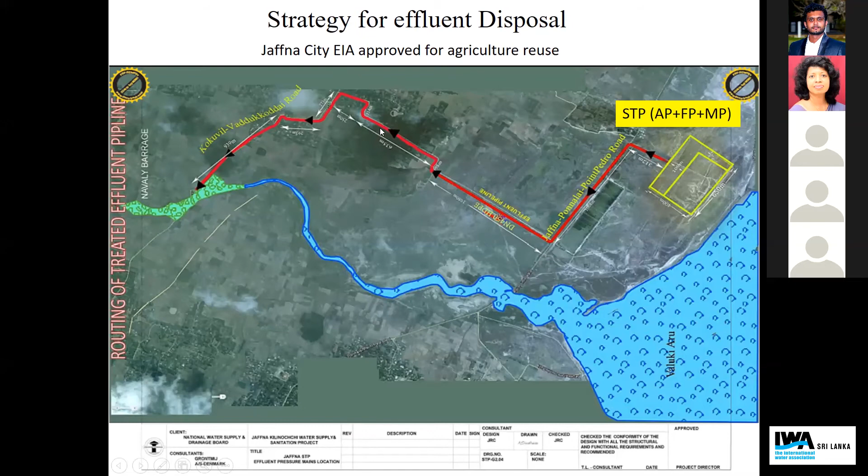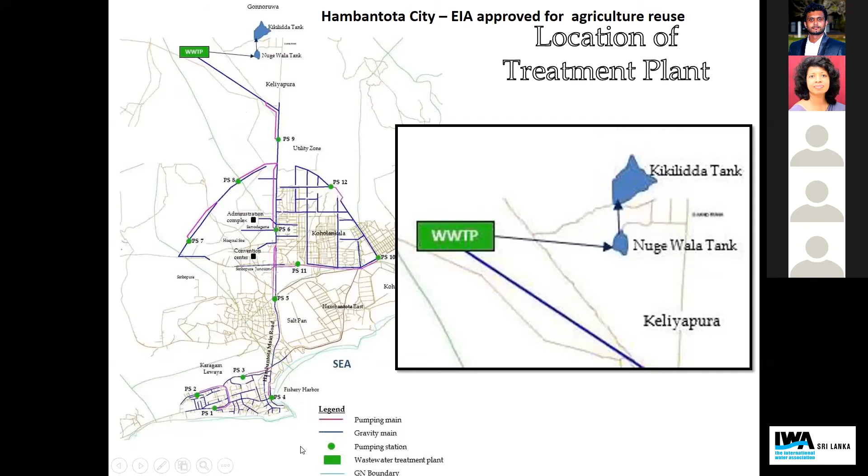And similarly, Hambantota, we have got the EIA clearance for the reuse. Rather than discharging to the sea, we have taken it inland, because Jaffna and Hambantota are water stress cities in dry zone areas, so people can reuse that water for agriculture. Rather than discharging to the sea, which will create public social inacceptance because most of the salt is being produced in the southern coast in Hambantota area.

And finally, what I want to highlight is about the industrial siting policy that we adopt. There is a cabinet decision by the Water Supply Ministry and the Ministry of Environment joint cabinet paper, where siting of high polluting industries, type A high polluting industries, are discouraged from locating upstream of the drinking water intakes. That will safeguard against micropollutants.

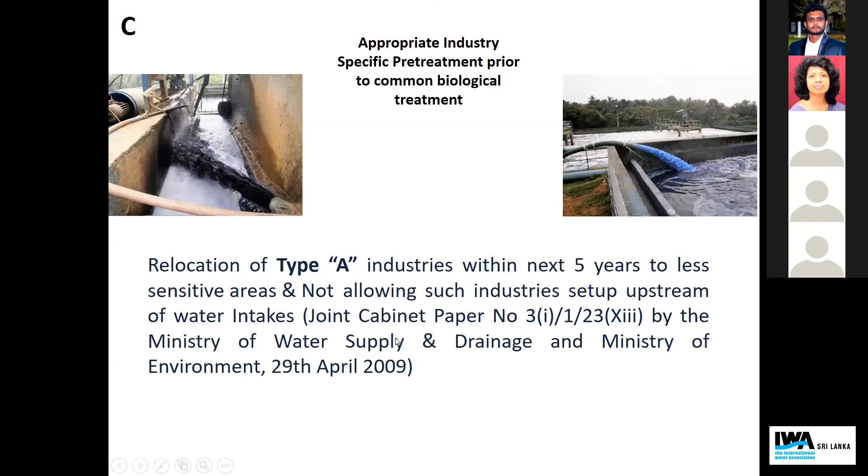Micropollutants that are not being removed in the biological treatment have to be removed by the appropriate industry specific pre-treatment. So these are the type A industries under the industrial siting policy. You can just see some of the industries.

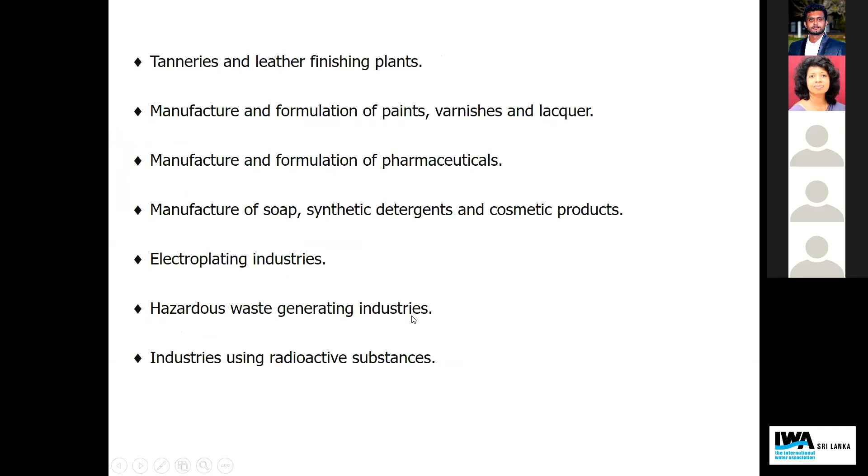So by doing wastewater treatment, basically we are increasing the life expectancy of the population and safeguarding against environmental pollution, and also encouraging ecotourism. Thank you.